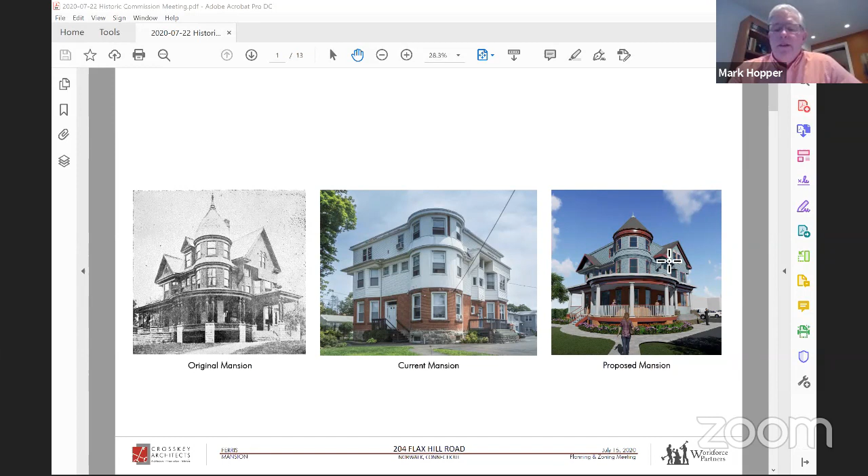So really just going in, the documents I'm showing you here are part of our zoning application. There's a number of slides here. I won't go in detail on every single one, but I wanted to highlight a couple of features so you can get an understanding of what we're doing.

This top plan is the existing floor plan. You can see this little side porch into that front unit, the side porch into the central stair that ties all those floors together. So in our proposed floor plan, you can see the extent and layout of the wraparound porch, really emulating that central stair centered on what was the historic main entrance of the house, then bringing the wraparound porch to the side that ties into the side lobby.

We haven't looked at extending the porte cochere. Primarily, there isn't a need or use of a porte cochere in today's modern world, and from a more practical standpoint, because of our parking requirements, we have a side parking lot here that if we were to emulate the historic porte cochere, would have rendered this main parking area to the side of the house unusable.

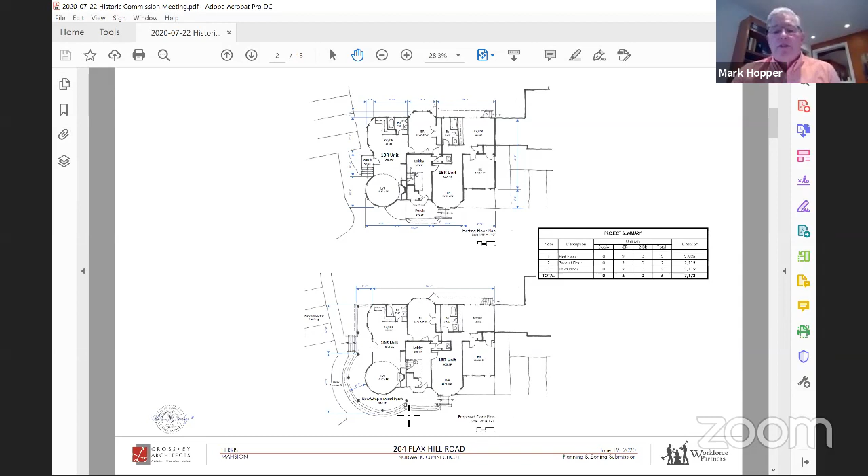So we've really been trying to match function with a historic intervention to bring this building back to life as close to as it once was.

Again, our anticipation is that we're hopeful we'll get back to some level of existing siding that was covered up. But if not, we are also prepared to provide shingle siding that's very reminiscent of what the existing or original building was.

Some of these drawings also indicate heights, which are things that Liz spoke about, some of the things we're looking for that don't meet current zoning, but certainly putting back the roof over the tower, the corner turret, is an important feature of this project. So we need to get some relief from the existing zoning codes.

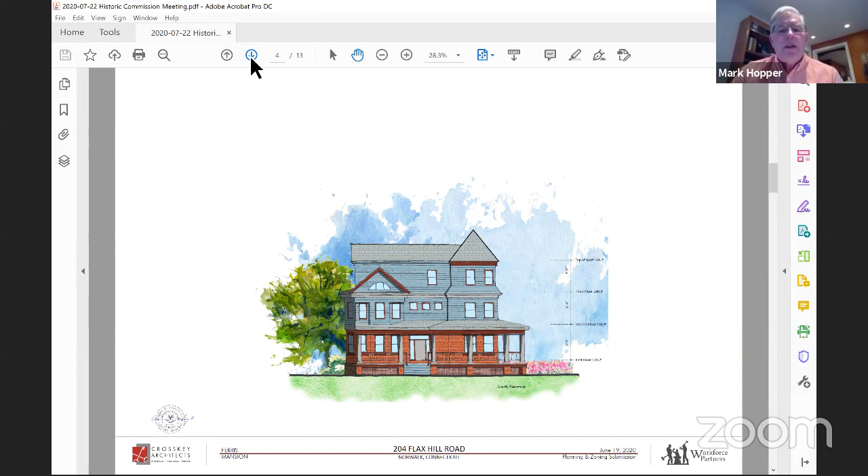This colored elevation shows what we anticipate the coloration of the building. And I'll jump one more to get to materials that we are anticipating using.

Then we'll be looking to also incorporate various trims on the facade, and we've looked at and are showing a couple of different types. Again, a composite trim that's paintable, but looking at shapes that are very reminiscent of the detailing of the original building.

So maybe before I move on and talk about the new building, I think I'd open up to see if you have any questions that I can answer or address.

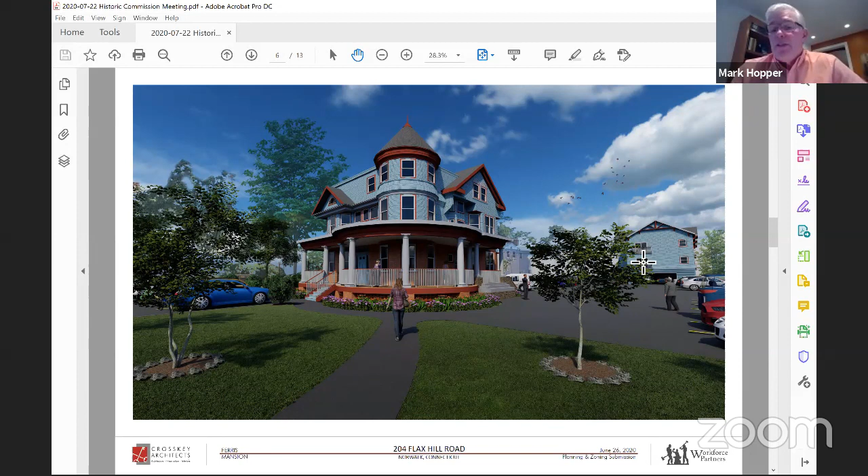Just so you can see how the two buildings kind of work together - maybe this is a good way to move into talking about the carriage house building that's to the right of the Ferris Mansion. This gives us an overall view of how we see the Ferris Mansion looking upon completion. The annex building that Liz talked about is kind of at the rear, and the new carriage house building occupies this side of the site, which I think helps frame the site and frame the other projects that are on the site.

We're fortunate in some degree that there's quite a bit of slope at the back side of the site, and fortunate meaning we were able to tuck this new building into the side of the slope. It's really kind of a single loaded corridor design where we've got an interior corridor on the lower level and exterior corridors on the upper level on one side of the building, but then we're able to get units on the lower side of the slope of the building. We essentially get 3 floors of residential units.

A variety of different sizes, from studios to 1-bedrooms to 2-bedrooms on the 2nd and 3rd floor. So this lower level is what you see, kind of tucked into the hillside. The outside obviously has full exposure for natural light and ventilation.

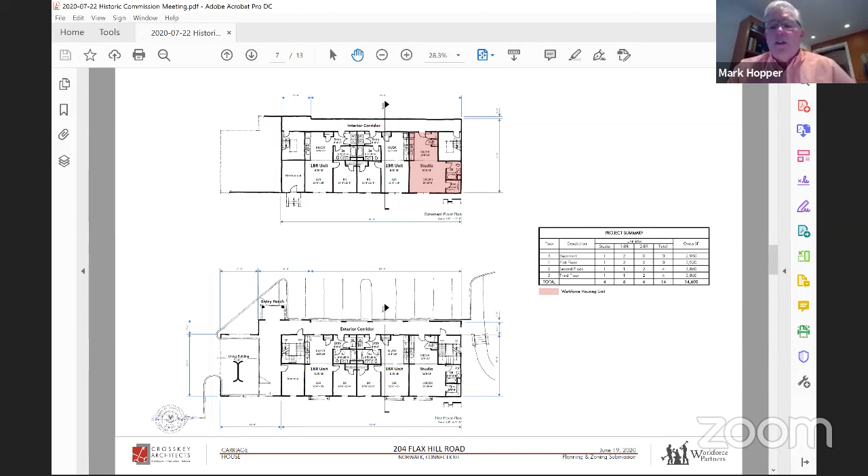Then you go up to the main level. There's an entry porch that gets to the exterior walkway that leads to the main stair, and a secondary stair that gains access to all of the units, be they in the lower level, 1st, 2nd, and 3rd. There's parking just outside, and then there's a little corner of the building that has 2 parking spots that tuck underneath the building as you get to the 2nd and 3rd floor, which expands over that parking area and gets us other unit types, 2-bedroom units on the 2nd and 3rd floor.

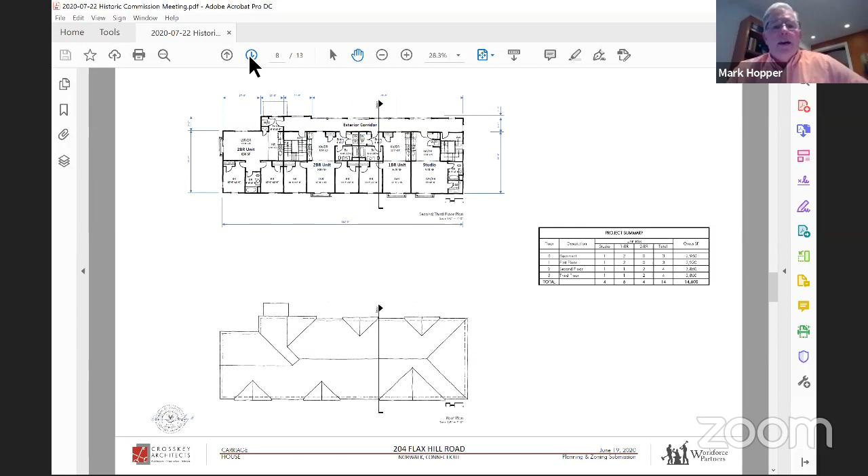So a nice mixture of units, and it allows us to increase the unit count there. But then, as Andy talked about, still meeting the affordability requirements and market that they're looking to achieve.

As we found, and as Todd Harrell also noted in a report that he provided to Workforce Partners and maybe provided you as well, there's very little historic or character-defining features on the existing carriage house building. Over its history, there's been a lot of different interventions that have occurred. Obviously with converting that carriage house into a residential unit, there's been a lot of tacked-on porches and stairways and exit stairs. So really, the building has been sided.

So there are really only 2 primary elements you can get a glimpse of if you look at the existing building. That's this really exciting flare detail where the building transitions from what we believe was clapboards on the first floor to sidewall shingles on the upper floor with a strong belt course with trims. So that's one of the elements.

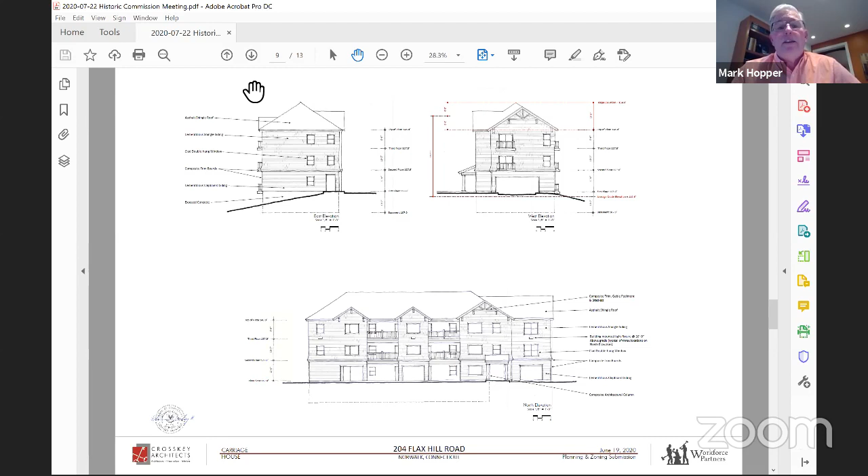We also incorporated a projected roof, or pediment, held up by brackets. The east elevation gives an indication of the slope and shows how the building tucks into the side of the hill. The north elevation gives an indication of what the building looks like there, again incorporating the details found on the other 3 elevations.

Coloration is similar, not exacting, but similar to the Ferris Mansion. We wanted to tie the 2 buildings together in materials and coloration so there's a dialogue between the 2. I think it frames the site rather nicely.

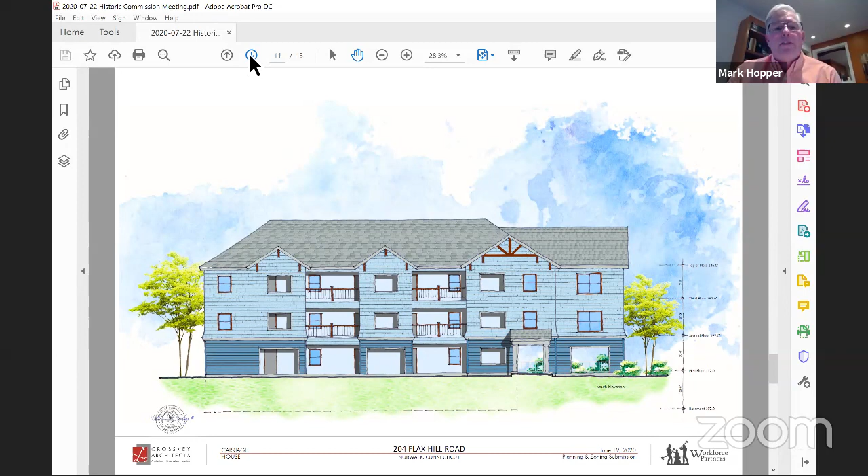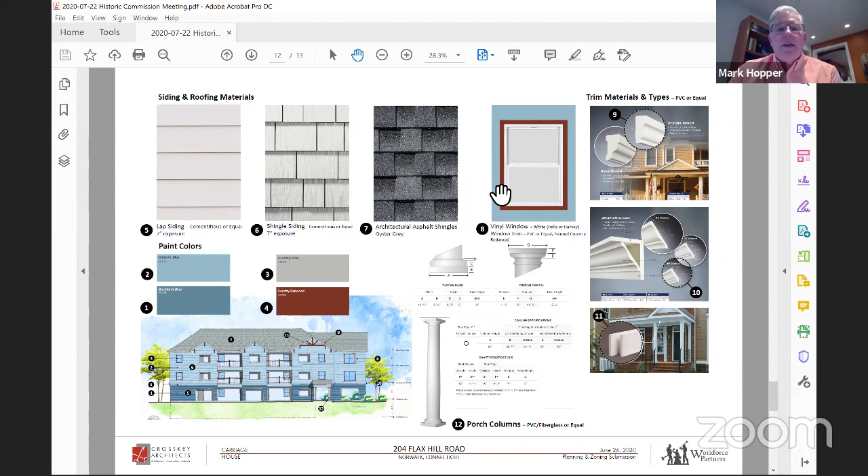Getting into materials, it's very similar to what was found on the Ferris Mansion, with the exception that now we've got lap siding on the lower floor where the Ferris Mansion had brick. Again, very similar trims and paint colors and materials for composite trims to create some of the detailing we're looking for, as well as capitals on columns. And then a rendering of what the finished product would look like.

So that's all I have for you today. If you've got questions about this building, we'd be happy to answer them. But I was happy to be able to present this to you so you could see what the thoughts of the project are.

Okay, thank you. Any questions from the commission? I'll take that as a no.

So we should ask for a motion in support of the project. Commission members, can we have a motion to support this project? Moved. Was that you, Eric? Yes, it was, Joe. Thank you. I'll second. And that was Holly. Thank you, Holly.

And where did Liz go? And Judith. Liz and Judith, raise your hands if you approve. They have to unmute. Judith is a yes. Liz, yes? Yes. Okay, and I'm also a yes. So that's a universal approval.

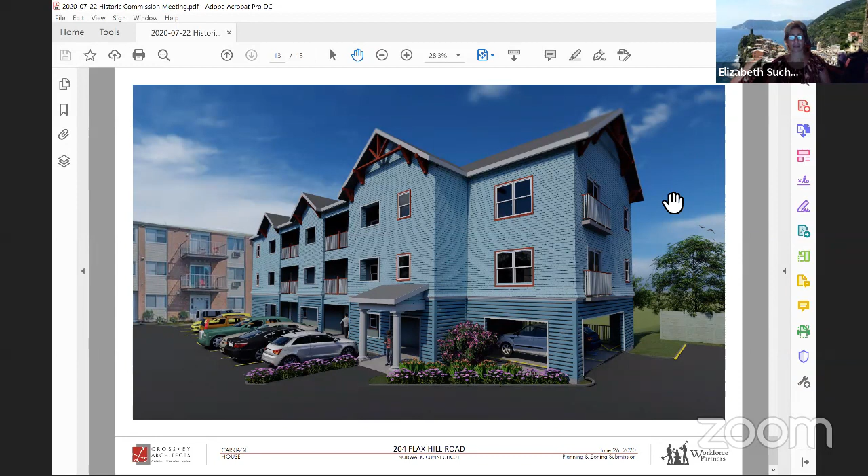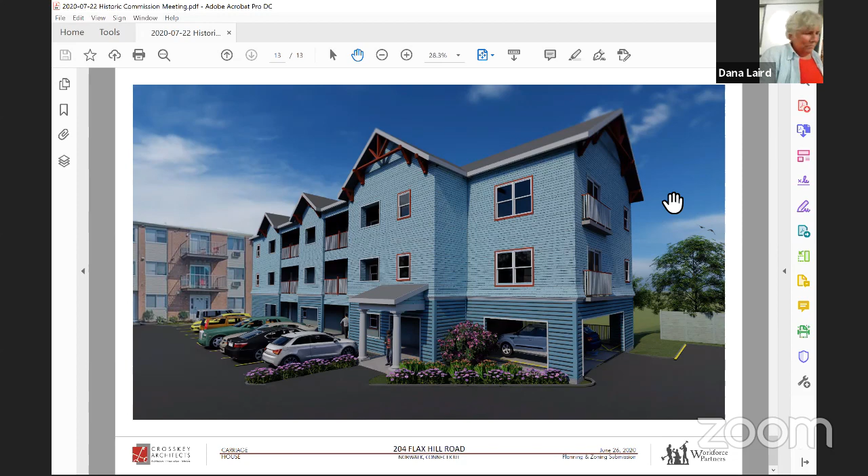I know it's difficult during dinner and on a summer evening, but we appreciate everything you've done on our behalf. On behalf of Workforce Partners, I thank you again and wish you all a very nice rest of the summer. Thank you. Night all. Signing off, bye-bye. Is that a motion to adjourn?

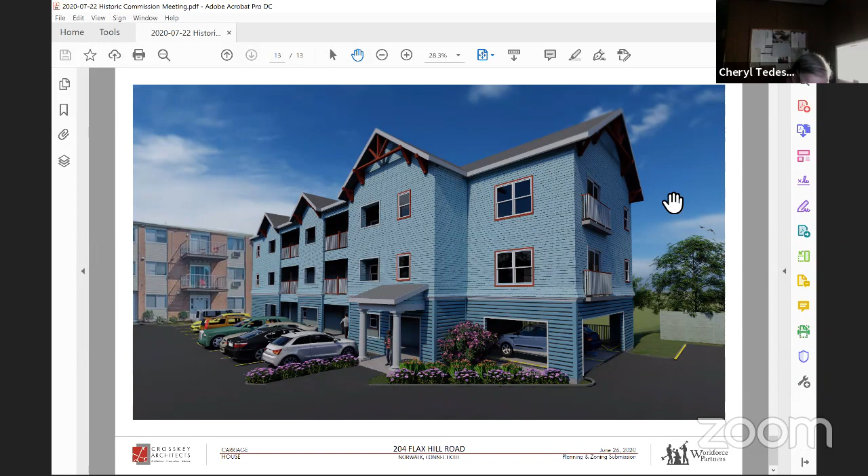7:42. Moved. Thank you, Eric. Take care, Dana. Okay, bye-bye. Everybody stay safe. Thank you. Bye-bye. Say hi to Kathy for me, Eric. Okay, we'll do.

Yeah, we're really off. And it's on YouTube, by the way. It's recorded. Oh, how did that happen? I banged it up against something today. Oh, and it came... oh.

Yeah, I was thinking about that call. I guess I was talking to Todd about that tower, and I realized, A, we don't, unless we can find the blueprints, and B...